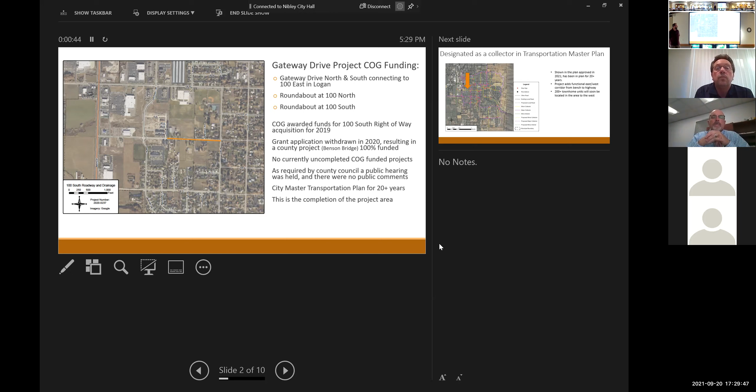So here's our plan. You can see that we've planned major traffic from east to west, and this is one of our collector roads to take traffic from our bench. So a lot of the traffic will come down and feed right onto the highway. There's been a lot of growth and development in here, and you'll notice the schools that it'll feed right close to there, so it'll take a lot of the traffic from those new developments. But anyway, next slide.

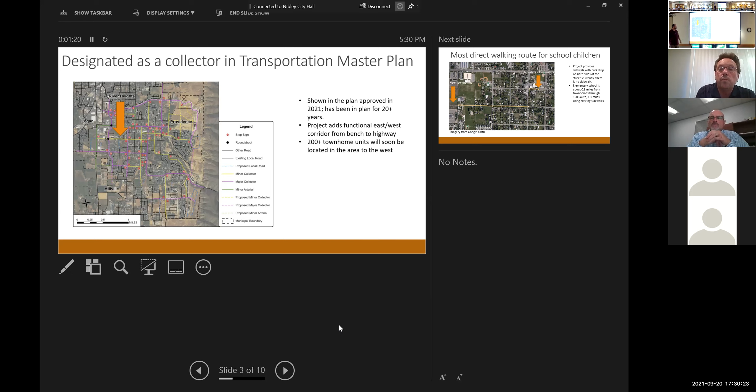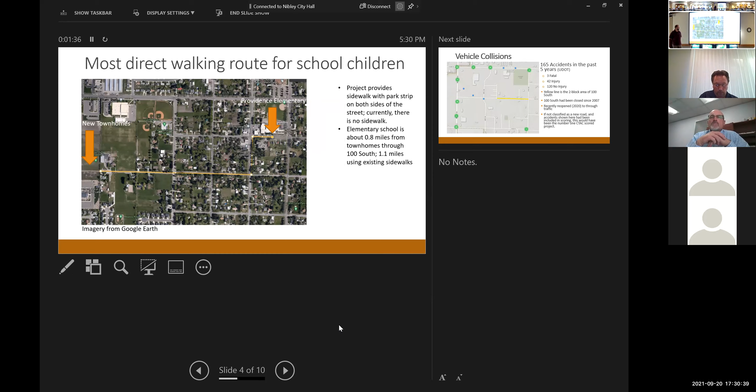All right, just to zoom farther in. This one shows where the schools are in the park, and kind of shows right in our downtown, our heart of our traffic area corridor. Anyway, go to the next slide.

We've already talked about safety. Just kind of split through these ones, they're just kind of to show you images of what it is and where we're at. Yeah, one more, there we go.

So this is one thing, since we've been here last, we have started a project improvement throughout some of the rest of our downtown core. We will widen this year before the end of the paving season. We'll widen from 200 West all the way over, and we'll widen 4 blocks to match that. So that traffic coming onto this stretch is going to continue to increase, that congestion continues to be an issue. We'll widen into our full city standard on that stretch here. So anyway, we'll complete the full stretch there.

Anyway, any questions about the project? I think I have another slide or two. We can stop at that point. Oh, no, okay, any questions? I know that's a new one for us, and I didn't mean to take a lot of time going through all the projects.

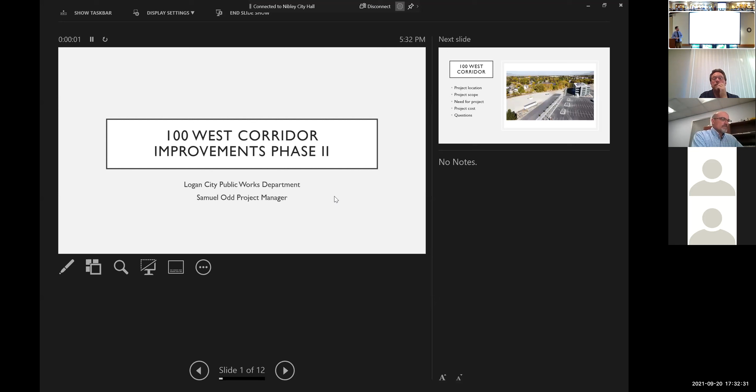Jeff, why don't you go to the 4th slide? We'll start there. So 100 West, this has been before this body a couple times. This is the final installment of this. We are planning to bid this in a month and a half and start construction in the winter and have it done hopefully a year from now. So this is our final time coming to talk for this project. As you can see, a bridge over the Logan River, right turn improvements at the highway, and then widening the whole corridor at 80 feet. Does anyone have any questions?

I will note for the ones that are in the CMPO, this is the project that we approved for the exchange funds to try to mitigate and make the project work with the COG funds that are available. Because of that, we were able to lower our ask this year. We're asking for about $1 million less than we thought we would have to. We're only asking for 1.6 million.

Have you purchased the properties on the north end? Yes, the north end, we've actually got all the properties. We're still working through some of the properties through the center of the project, but we've got all the key ones to make the bridge and connection around the church.

Did you mention the free ride onto the highway? Yeah, so if you're familiar with the intersection of 10th West and Highway 89/91, how it's got that free right hand turn to head southbound, we're basically mimicking that here at the highway across the street from McDonald's.

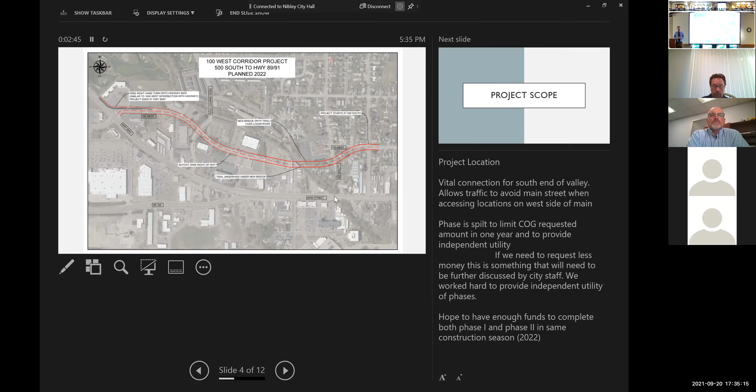Thank you. Thanks, Sam. Cache County.

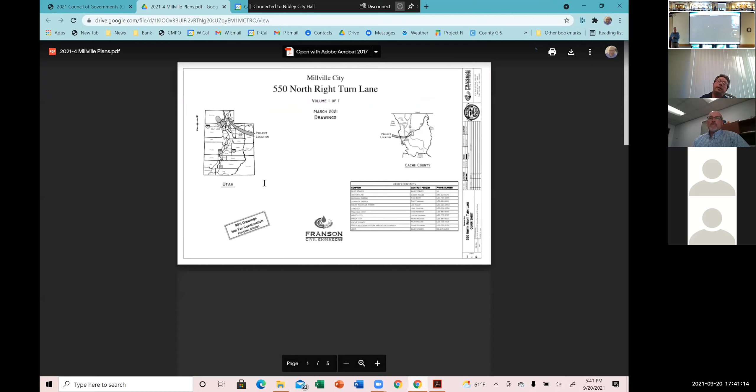Basically, what we've requested funding for is on 550 North, where you come down from Millville, the high school, Ridgeline High School joins into it. There is no turning lane to turn right. So if somebody's turning left here, especially during school hours, that traffic backs up clear up and back up halfway the road because there's no right turning lane. So our purpose is just to get the funding to put in a right turn lane to get rid of that traffic.

That's it. Any questions for Dave? We don't have that on Google, do you? I could try to pull it up. You want me to try to pull it up? Pretty straightforward, yeah it is.

So right now, there's not a right turn lane there. Apparently, the school district was gonna put one in when they put the school in, but it never happened. So should they be paying for it? That's what happens with the school districts.

And if you go just right there, you can see the roundabout - that's another one of our projects. Actually, right here is where we're talking. If there's any kind of a big vehicle, you can sneak around a little bit, but if there's any big vehicle there.

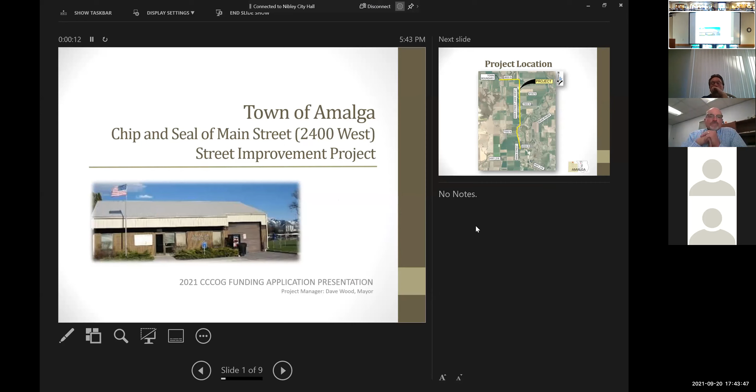I'm Eric Gersbauer, the town engineer from Amalga. We can skip to the next slide since we're all skipping slides. The project is up on Main Street, 2400 West. It goes from the old red church there, north of town boundary.

We're just gonna simply go in and re-treat it, but there's some minor patches in there. We can kind of fix some areas, some edge work. Really basically a chip seal and a fog coat. When we get it all done, it will definitely improve what's out right now.

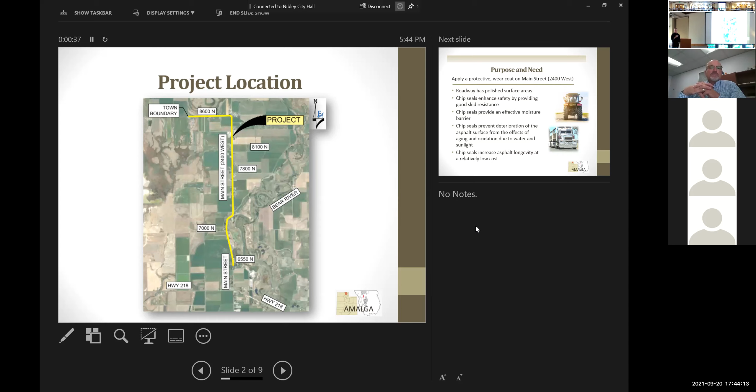By the next slide, please. This is - I caught Mayor of Amalga driving his tractor down the road to the south of us here, so I thought I'd put that on too. Just, you know, something right there.

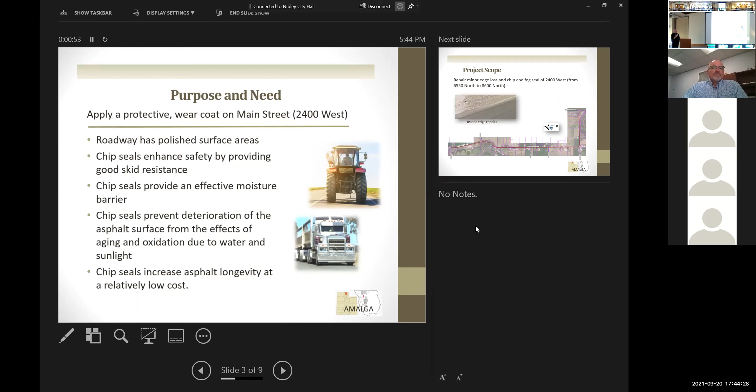But a chip seal definitely improves all this. It's good friction on it too. It increases - how about the next slide?

You kind of see on this upper left-hand corner here, there's a little bit - some areas just need a little bit of patch on it, to kind of bring it through. You can see on the bottom picture, again, it's quite a project, it goes quite a ways. A lot of traffic, a lot of local vehicles take that road.

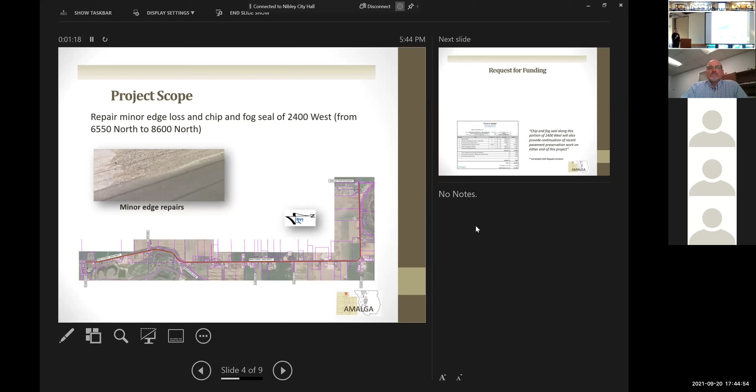Sort of next slide, you can hit that 2 or 3 times on that. Now, on this COG funding project, we applied for 133.2 COG funding. It's actually 125.4 - there was a typo on that application, so if this is funded, we'll have to make that adjustment.

Next slide. I'm sorry, say that one more time. The COG funding in the application says 133.2, it should be 125. The requested amount or the total project cost? The requested amount. Okay, yeah, so make that adjustment. But we just opened this one.

You can see in the lower left picture the old chip seal is wearing fairly well, but it's getting a bit polished with some wear. The trucks cut that corner short, so we'll go in and deepen that area and put another coat on it, maybe a chip seal.

Next slide. Same here, as you head north around the slough and around the corner, you can see it's starting to polish. The new surface will definitely put friction back on the road.

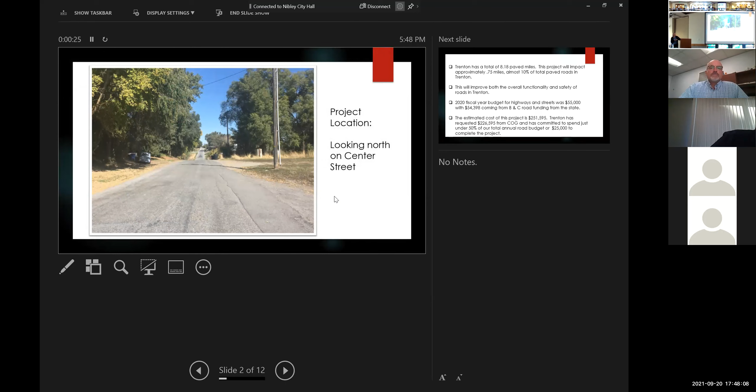We also applied for this project a couple years ago, but we've changed it a little bit. We divided it into two projects. This is actually the south side of the road, which would be the second phase. The first phase, which we're hoping to do this year, is the north part of the road. You can see several years ago we put in the water lines and the road sunk in that part.

You can see where that road was cut out and how much it's sunk in that spot in the wintertime. If you're driving along there and it's slick at all, you get pulled into that and it's kind of scary. So our plan is to recycle all of that, dig it down, and put in a fabulous new road. We also have a culvert we need to replace at the end of this road that will help with drainage, and an intersection—the smallest picture there shows the intersection that's in rough shape.

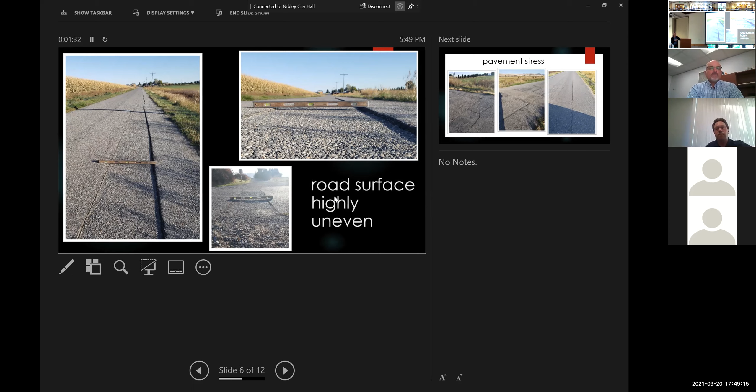So this is the first phase of the project. The second phase, which we would apply for in future years, would be the other half of this road. You want to go to the page with the cost on it? Yeah, you can see the road's in pretty bad shape.

The total cost is around $250,000. We would put in $25,000, which is about 10% of the total project, more than COG requires, and we're asking for 226 and change. Any questions? Is this for half that road? Yes, this would be for half the road, on the north end. It goes all the way up to where it turns.

So you'd do the north half first, it's in the worst shape, and then the south half—it's the same thing on both sides. You might mention that this is a road that will be pulverized and completely rebuilt and widened. Right now it's about 20 feet wide on both sides; it'll be 24 feet once it's complete.

In your earlier statement, when you said we have more money, you're not saying we should try to do this all in one year instead? No, the applications we have now are sufficient. Just wanted to make sure I didn't miss something, because that'd be great.

We were awarded one project before, back in 2017-2018, to redo our road that connects with Malchus Road. The picture the last presenter showed of the chip sealing was actually Trent Road, and we paid out of our own budget to have that chip sealed. So we are invested in keeping our roads nice. Our total road budget is around $55,000, so the idea of paying $225,000 is overwhelming when your total road budget is only $55,000.

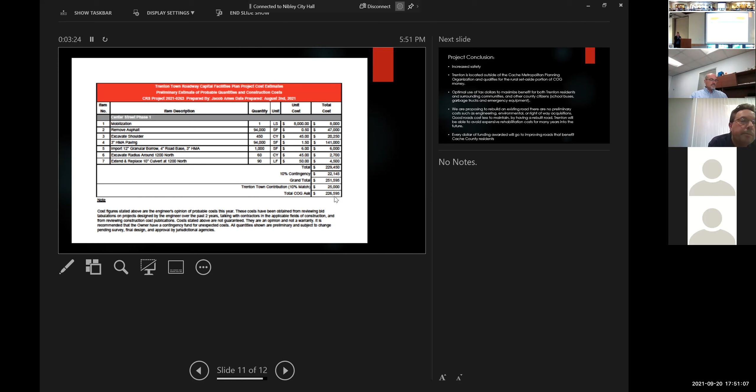Any other questions? Thanks for the time, thanks for calling.

Mendon? You do this remotely yet? Eric's good.

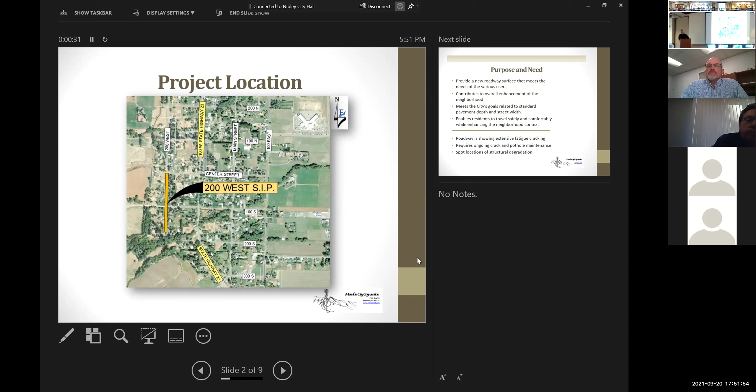The scope is to widen the road. We've got some drives on the west side of the road to tie into, and on the east side. It comes on a slope, so the west side is a little slow and flattens out, while the east side has some slopes to it. Then there's some fancy landscaping on the south end.

Next slide, I see two or three there. We'll go through some more. We're requesting about $113,000.

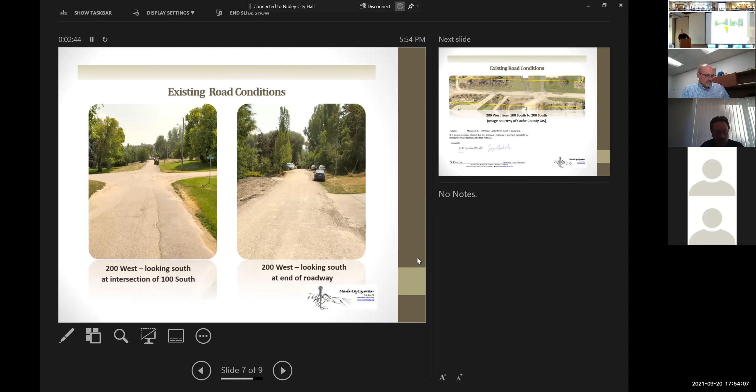Next slide, you kind of sat back and took some pictures of that road finish there. When you head south you see the parking and the folks on the right hand side where they opened that park. I did switch the pictures in, so it looks narrow, they're really great there, but you'll see dumpsters actually back in there. The neighbors down there are improving their homes and it's really torn up that stuff, so if we can widen the road it will make it look nice.

This is off the county's GIS map, so you can kind of see the condition out there. It's pretty obvious, that's a pretty good project. It's a little project that will definitely benefit the community and enhance that area.

Any questions? I did have a geotech look at it. It's a great candidate to pulverize the asphalt, blend it in with the base, then repack and repurpose the asphalt.

The county down south there has some nice trees, and the landscaper put in some landscaping around there that's kind of work around now. So you look at the plans, it's really about working around the improvements that are already there without doing too much. Any questions for me that I can answer on this?

Did you say you're going to make that turnaround gravel? Yeah, gravel. Is that allowed with COG money? We had a COG project before that, so back up a couple slides. In the rural areas it actually would be allowed. State code says it just has to be on a B and C road, it doesn't specify the surface type in rural areas. In urban areas it wouldn't be allowed.

But that was kind of our thought, just put gravel down there. I mean, it got done.

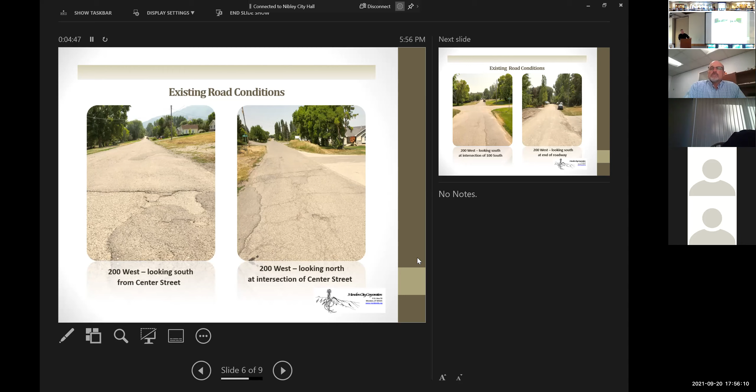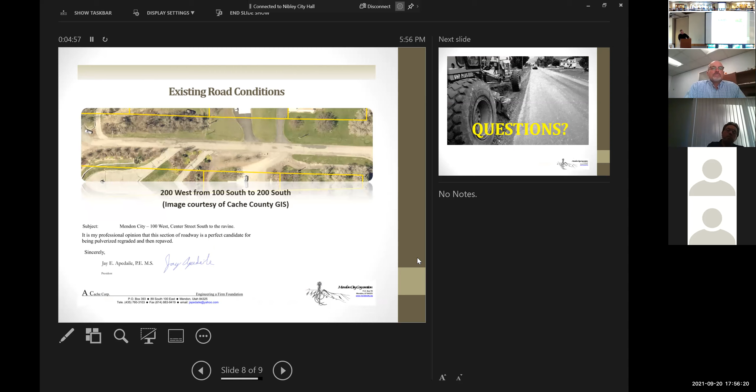We will. In fact, in the plans we have, on the turn at the east and south end, we're going to shift that a little to the west, put it more back. Go to that slide, one more up. Right there, you'll notice on the south end it kind of jogs down and takes a dip. When they take that dip, we'll push it back. So you're going to push it to the west then? Yeah, there's more room there.

I think we looked at the aerial photography and contours. That kind of fit contour-wise, but if we push it back to the west, we've got a little more area there. It's been landscaped, but it's just grass, so we'll take some of that out and put it more back in the center of that area.

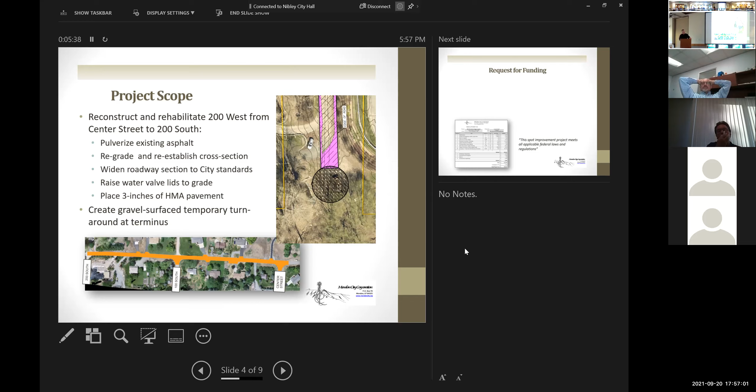Any more questions? I'll just say... what's that? I'll just say. Oh, you're up?

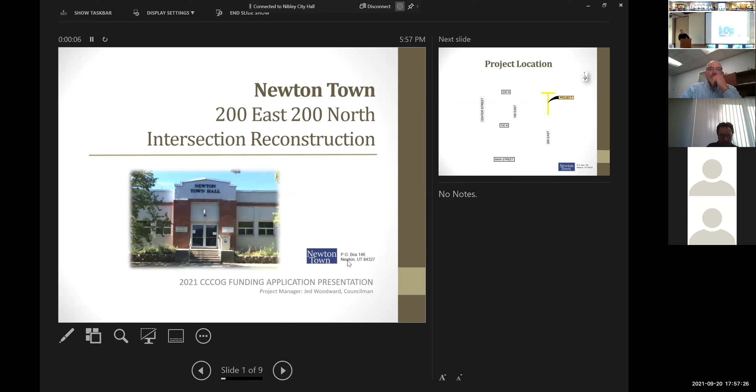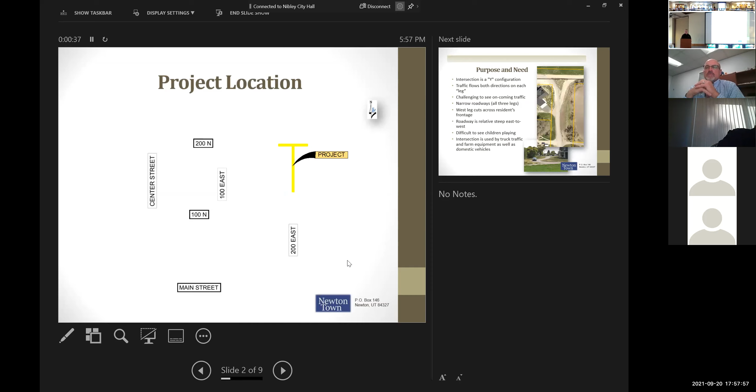Let's go to the next page now. That's interesting. So up in Newton, this 200 East here on the north end of that intersection has a Y... traffic coming from both directions, so you get frequent traffic at one of the intersections, which is difficult.

Kids on bikes have a hard time up there, but the issue is the east side dips and the west side rises, so it kind of goes up the hill. The idea was to flatten this out, level it, widen the road, and reconstruct a nice 20-foot town standard roadway. Go to the next slide.

So what we did, we pulverized the left-hand side, put down asphalt, pulverized and used the base. Then on the east side, over here we got the fill. It kind of comes in but drops, so we'll fill this area in and try to match it. This side will come down a little, this side will come up a little, trying to balance out the cut and fill and lift things up.

I should have put a cross section in the plans. The idea is to do a nice cross section through there, and on the north end we'll need a culvert that carries water from the west to the east. Again, it's a good project. This nice asphalt can improve the intersection for traffic.

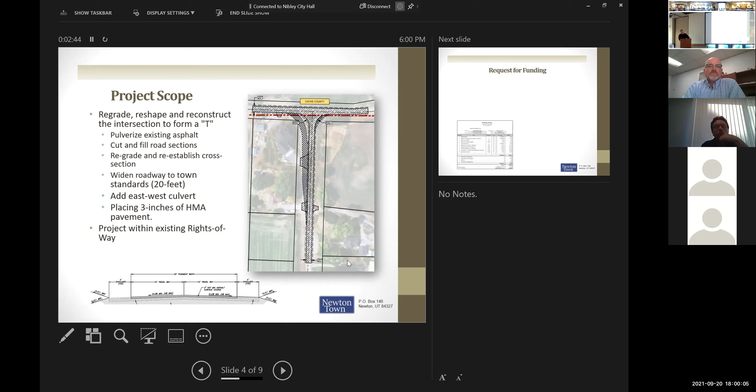So there'll be some improvements in backfill structure, bring this to grade and take care of landscaping, and take that gentleman's house on the west corner there back into a usable corner.

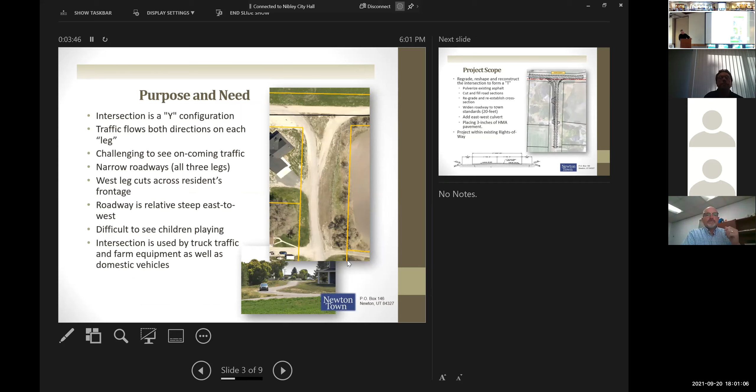One thing about that picture he showed, there's a better look at it. It's really hard to appreciate the elevation difference as you drive down that road, what a difference it will make. Even that picture doesn't do it justice. It's really a difficult intersection, and the improvements are obvious when you stand out there - you can see how it's going to bring that whole grade up and make it a lot more usable to that homeowner. Let's go to the next slide.

There you kind of see that. So I'm looking west, you've got that drawing there - I mentioned that it goes back up again by the house. And this one on the bottom right, I'm looking east. That one doesn't show up - it kind of drops off at the end and turns around and goes over. Let's try one more. There, you kind of see it.

So it is kind of a funny intersection, but the idea is to take a lot of the hill, put some at the bottom, and bring it up so it stabilizes the intersection and brings it to grade elevation. I think that's it - any questions? Good project, I have a question.

As they're doing development in these areas, are homeowners required to develop the road in front of their property, or contribute to seeing that the roads work properly on their corners? They are - on the existing road. It's not on the existing road, that's an existing road, paved and everything. For development, for subdivision, for developing, yeah, if you're developing there, they're required.

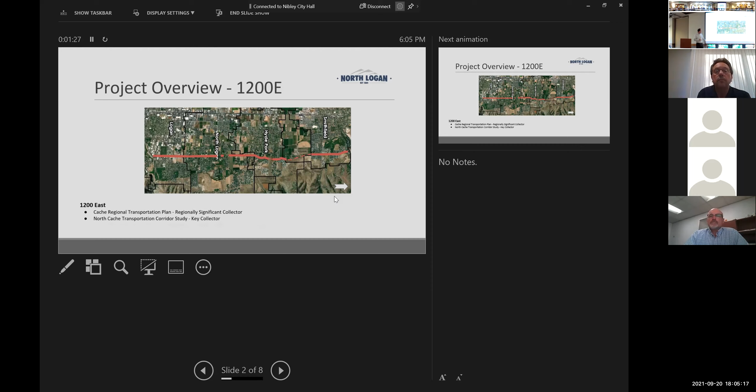We've talked about a bunch of different studies where this body and others have identified it. Now you may look at this and the dashed line is where we're planning to construct, and you're thinking something didn't go right with the engineering because we're leaving a little gap in there. There's a development taking place in that area that is already addressing the roadway there. What we need support on is this segment and this segment that are as yet undeveloped, or have already got development on the front end and won't provide any support to us on the back end at this point.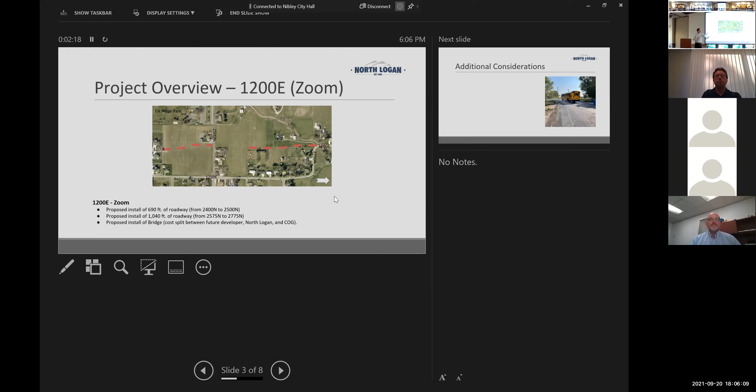So we're covering 2400 North and 2500 North. Then we've got some development that covers about another block, and then it connects out to this curve right there.

Safety, obviously, and congestion are big issues. We're really thrilled to have scored pretty effectively on that. It's going to be very helpful reducing congestion on 800 East and 1600 East by connecting this through to Hyde Park.

There's an existing bridge on 2750 and 1200 East with a wide variety of issues. You can see as the school bus goes around it, that doesn't look like it's going to be a fun ride on the way to school. This gets rid of that S-bend, and we'll be able to move directly from this point straight down to connect to 1200 East and take that aspect from that way.

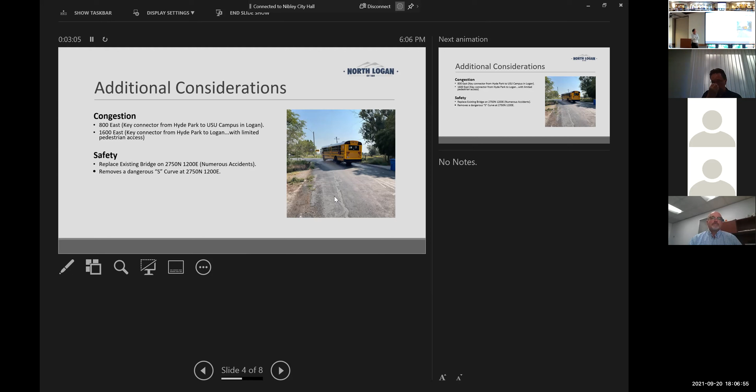Carrying on, there's lots of good connectivity in terms of what this road connects to everywhere else. That's certainly sufficient, I think, to just mention that. You guys can look at it in greater detail, and I can do questions on it. It's connected to not just vehicular traffic, but also to a variety of multimodal transit.

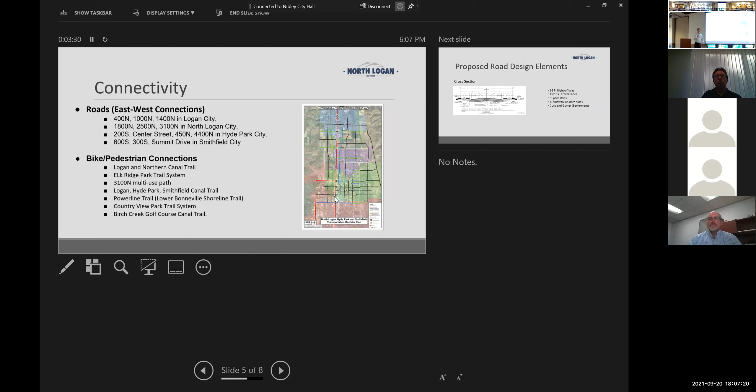Next slide, cross section. If you don't get enough of this from your engineers, you can look at that later.

We have a variety of betterments that we'll be adding in terms of utilities. We'll also add curb and gutter to help the stormwater there.

So what we're asking COG for is $1.3 million to complete this, in terms of both land to acquire as well as the improvements themselves. We have a total of just shy of 1.5 million in COG eligible costs and then some non-eligible betterments. We want to make sure we're showing COG that we've got a considerable amount of skin in the game on this project as well. So we will bring just shy of $500,000 to completing the project, including the betterments, to match the 1.3 million we're seeking from COG.

I guess there's not any minutes. I think that's it. Any questions that I can answer for y'all? Thank you, David. Sweet. Thanks, guys.

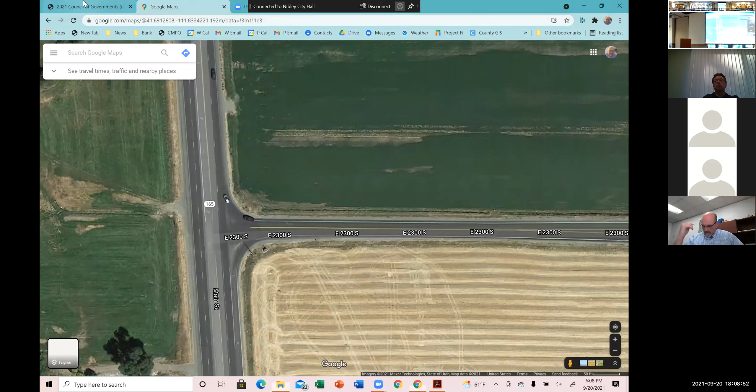If you're really, really afraid of it that way, we'd be happy to hook you up with a paper copy that you could fill out. But I really think it's pretty simple if you can just open that link and just type in 1 through 9, and I'd be happy to walk you through it over the phone, or hook you up with a paper hard copy if you want to do it that way. Just see me after if you want that. Are there any questions about that ranking or what's expected there? Done it before.